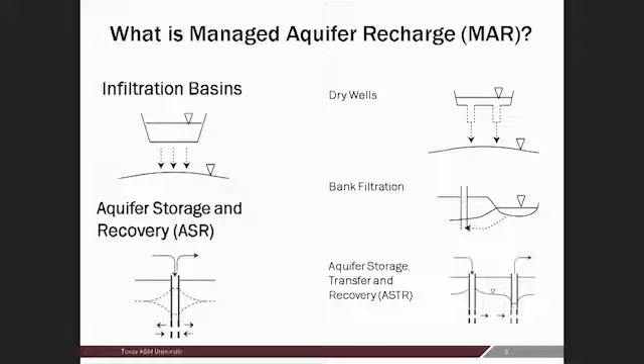There's also what we call dry wells, which are wells into the unsaturated zone above the groundwater that will allow water to infiltrate. This is a really popular technique in Arizona. Bank filtration, where we're somehow accelerating recharge from a river or a surface water body, and then aquifer storage, transfer, and recovery, where we're injecting into one well and taking out from another. And so I start with this just to give the idea that there are a number of these techniques that can accomplish the same thing as ASR does, but might be more appropriate for different geologic settings.

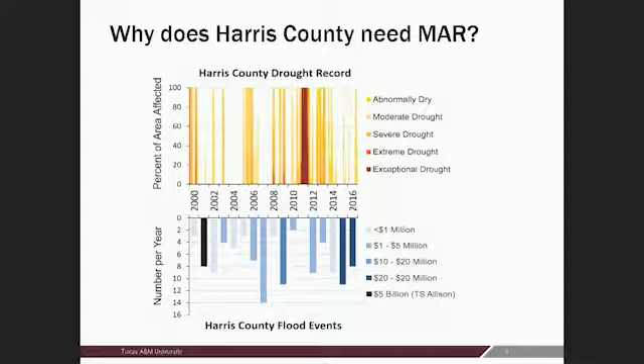And I show this slide for two reasons. One, because I want to show that Harris County is indeed alternating in flooding versus drought events. And two, to make a little bit of an excuse. So we did this, and you can see I stopped this graph right before a major flood event, right? So we finished this project the month before Harvey hit. And we wanted to do a follow-on really quickly with some of the pilot testing, and I'll talk about our pilot testing later. But the flood control district was pretty busy for the next year after that. So we're back up and running, and hopefully, we're part of this portfolio of projects that the bond issue there is going to fund.

Okay, so managed aquifer recharge for stormwater and flood control. And basically the question we're asking here is, can this technique be used as a flood control tool in Harris County? And that was the original question, coming out of these big events. And what we wanted to do was a feasibility study followed by the pilot project that I mentioned.

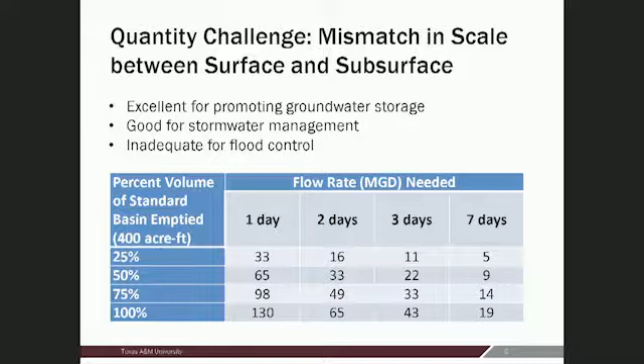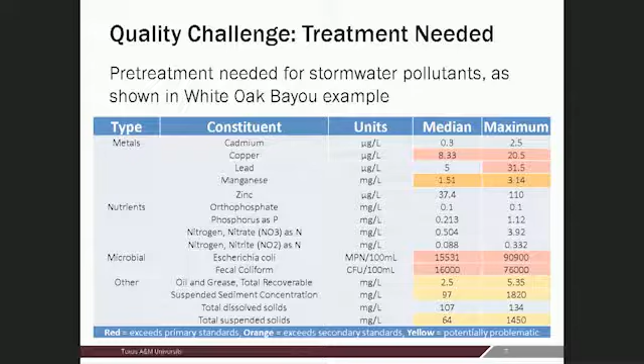And so we see that copper, lead, E. coli, and fecal coliform are 4 of our biggest offenders here, the things that we have to worry about the most. The microbial ones are somewhat easy to deal with because it's easy to chlorinate, say in an ASR well as you're injecting. You add some chlorine and that's less of a concern. But the metals can be problematic and are classic pollutants in stormwater.

The other things that cause problems are the suspended sediment concentrations, the total dissolved solids, and the total suspended solids for 2 reasons. One, the metals tend to tag along with these particulates. And 2, they tend to clog our formations. And so high values of these require frequent cleaning of the well, frequent maintenance of the infiltration facility.

Okay, then our third challenge is the geology challenge. So we were looking, and this is probably pretty universal for the Gulf Coast aquifer, but not necessarily for every aquifer in Texas. The geology challenge here is that we have these sequences of sedimentary layers.

Thanks for the figure, by the way.

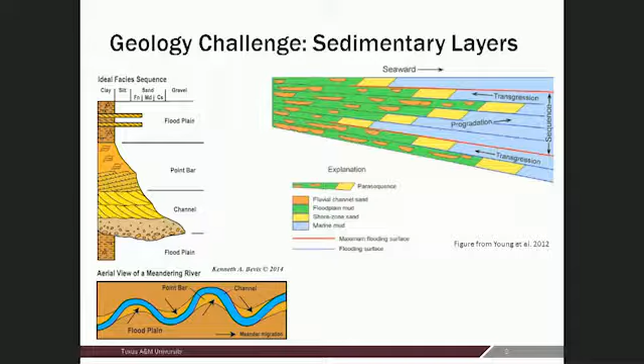And these facies, which represent the ocean and the seaward progression and the deltaic layers coming in and out, cause deposits where we have channel sands, which are good for infiltration and ASR, and then interspersed with floodplain muds. And this can be quite problematic because what we want to hit are the high permeability sands and avoid the muds because they have lower infiltration rates.

And so looking at this, we can maybe try to target areas that have more of the more favorable layers and less of the other ones. But the real challenge is this idea that it's very heterogeneous, very mixed, and we don't always know beforehand what we're getting when we look at any given site.

Okay, so I want to talk about some of the pluses and minuses of each of the 4 different methods that we looked at to achieve this goal of emptying or partially emptying portions of these detention basins so that either more floodwater could possibly be stored in them or more stormwater, or that we could promote groundwater infiltration in these areas. Okay, so the first one is enhanced infiltration.

And here we alter the bottoms of existing basins to promote their natural infiltration rates. And I say natural, but many of these basins, the way they're constructed, aren't constructed in a way that would promote infiltration. In fact, very frequently, they're dug into a heavy clay on purpose. Right? So we want to ask, okay, is there something that we can do, maybe soil amendments, trenching, or proprietary systems that might help us promote infiltration?

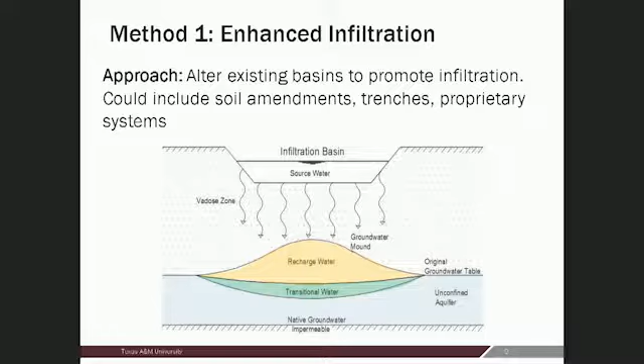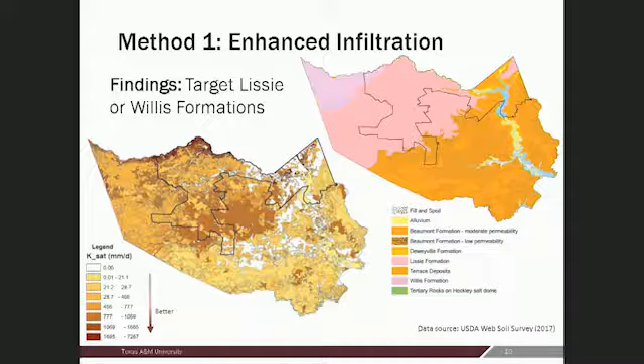Okay, so our next question is how much can we reasonably expect from this scenario? And say under a unit head gradient, so 1 meter of head, what's a reasonable fraction of stormwater that should infiltrate? In order to empty a basin, we would need to see an infiltration rate of 2,500 millimeters per day, which is quite high if you look at the average values in most of these areas, closer to a saturated conductivity of under 1,000.

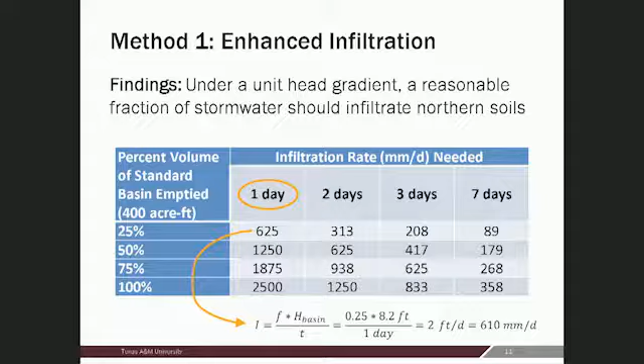But what this means is 2 feet per day, or 610, was our general target for getting some water down and partially emptying the basin to allow for a little bit more storage over time.

Okay, so in general, we said, well, this is really low-hanging fruit. This is something, if we could achieve those kinds of infiltration rates, the county could come back in, retrofit some of these basins with whatever method or technology we suggested to do this. And that might be a fairly easy, low-cost, easy maintenance sort of procedure, but we might not get the volumes that we would really like to see ideally.

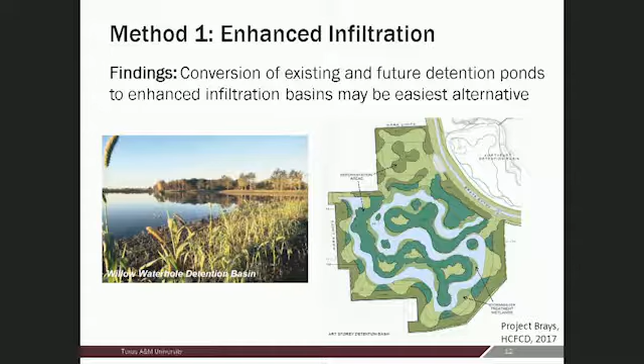So the next possibility are dry wells or unsaturated zone wells. So these would be drilled, say, in the bottom of a basin to overcome that geology, that layered geology challenge. So you could drill these into, say, a sand formation that was overlaid by a clay formation. And that would mean that these would be good.

So here's an example from California where they had this same sort of contrasting clay, sand, that worked fairly well and could work passively at the bottom of, say, one of these basins. Or it could be coupled with passive pretreatment in a scenario, say, like in a storm sewer.

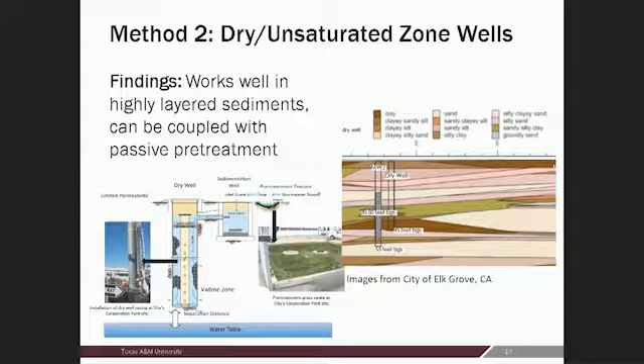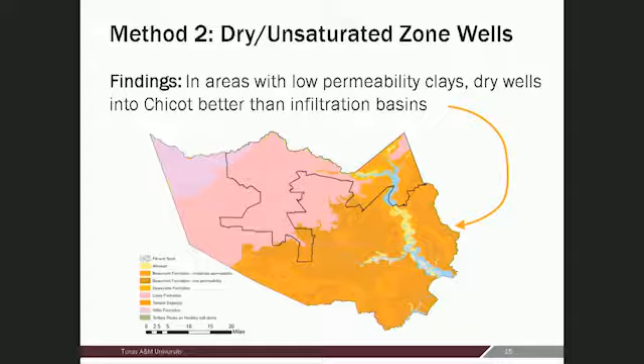That's how they're done typically in Arizona. Okay, so we said, well, in this case, we're better off putting these in areas where there are low permeability clays at the surface, and we can maybe try to get below them into the more flowing formations of Chicot, and they would work in these sorts of areas better than, say, infiltration basins.

Okay, so we did a little bit of a modeling study here to determine what sort of volumes we could get from these. And one of our big findings here was that instead of focusing on having very big wells and putting lots of volumes down into them, what we really needed to see were these small wells that had maybe low volumes, so over the course of an event, maybe only 50,000 gallons infiltrated, but lots of them in multiple places. So more of a low-impact development type of infrastructure or best management practices types of infrastructure rather than one big project.

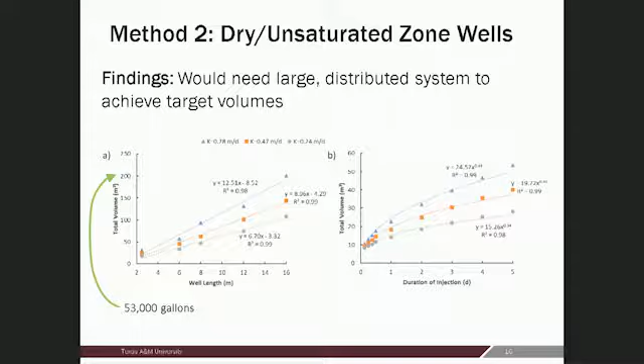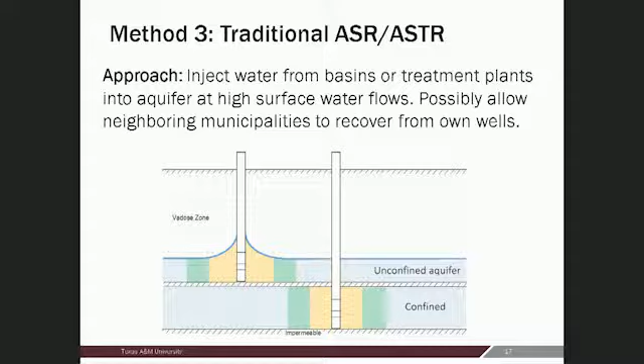So there's some talk of encouraging developers to put in these sorts of wells alongside their sewer systems. Okay, so traditional ASR and ASTR, we wanted to look at this from the perspective of putting these sorts of wells near a basin or near a water source, say an existing reservoir, or say near a water treatment plant that would otherwise discharge for non-beneficial use. And in this area, we have essentially the two types of wells, unconfined in certain regions and confined in the lower layers in the lower aquifers of the Gulf Coast aquifer.

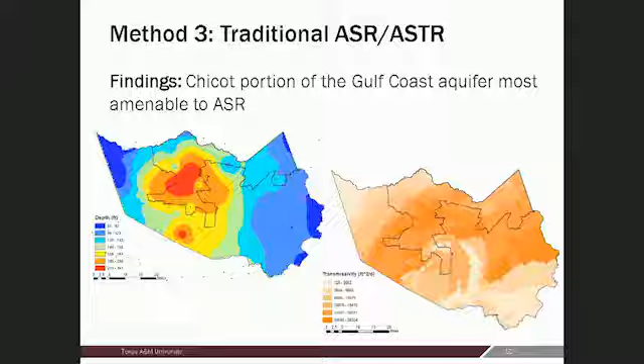So again, we found that the Chicot portion of the Gulf Coast would probably be the most amenable to ASR because history of depletion and current ongoing depletion in the lesser regulated areas of the county leaves room for potential storage, places where there's ongoing depletion, but maybe the subsidence hasn't reduced storage as much, and in these high transmissivity areas that would be able to accept the water.

Okay, so one of the big questions that the flood control district had was on pump technology and how much water could we possibly put down, and if we had bigger pumps, could we put more water down to get at the volume that we might need for our flow rates, for flood type situations. So, in general, our estimates showed that we could passively flow a well, so without any pump at all, at about 13 million gallons per day. And that would empty a standard basin in 13 days. We could use pumping to increase the flow rate, but it might be a bit of a waste of energy.

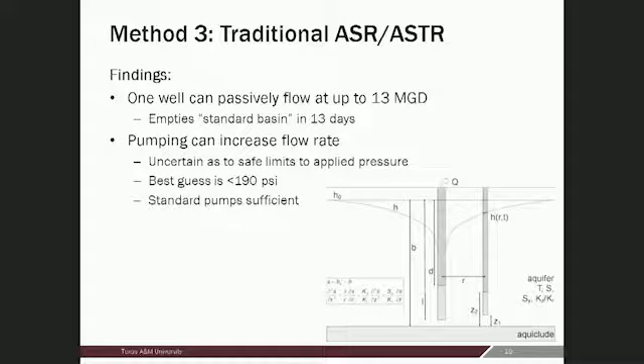And we don't want to get over an applied pressure of about 190 psi, because that's when we start having the same sorts of issues we have with hydraulic fracturing, right? We're changing our porous matrix. But below that limit, standard pumps are sufficient, but there's not really that much gain over just letting for passive infiltration. However, one injection well at 13 million gallons per day, which is big in the groundwater world, is not so big in the flood control district world.

And so this was sort of a back-of-the-envelope calculation about how many days, if we gave it 4 days, or 1 day with 4 wells, how far apart would these wells need to be spaced? That was the idea. How many wells do we need and how big of an area do we need to infiltrate that target volume of water? And so we're seeing in some cases we can't even do it, right? We can't do one day with just 4 wells. It's not possible to have that kind of flow rate into these aquifers. But we can get some reasonable values once we're either doing it more slowly or adding more wells.

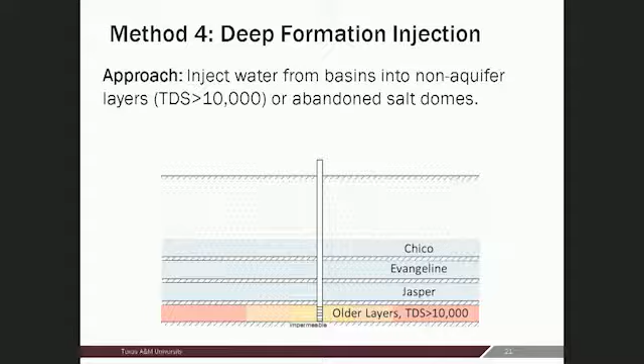The last thing we looked at was deep formation injection, and this is not so much for groundwater storage as it is for flood mitigation. So the idea here was that we inject flood water into these really deep basins or potentially even abandoned salt domes that might naturally have a total dissolved solids over 10,000. Now, why did we go for this? The idea here was that this was not regulated as drinking water, which goes back to the quality problem with ASR.

I didn't mention that, despite the quantity capabilities here, we have a fundamental problem with the regulatory framework. I'll talk about that in a little bit. Hopefully we'll have time. Good,

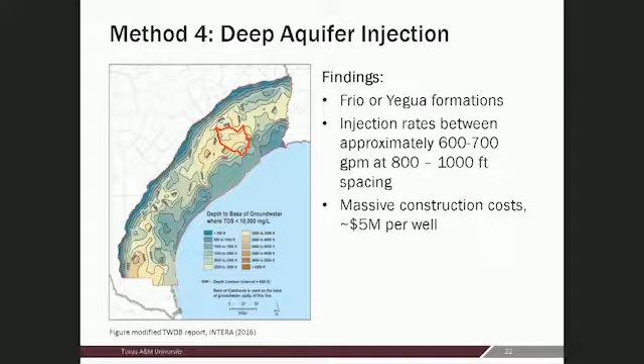5, okay. So looking at the deep aquifer injection and the most recent reports from Intera from the BRACS study, really, the Frio or the Yegua formations would be good here, but the injection rates that we would get would be approximately 600 to 700 GPM at about an 800 to 1,000 feet spacing. Not very good for the volumes of water we wanted, and also going down that deep, massive construction costs associated with this. It would really be prohibitive of taking this approach. So this was one we took off the drawing board pretty quickly because of the expense.

Okay, so to talk a little bit about the final challenge and the regulatory challenge, I told you the date, I guess, for my little bit of a third excuse here. So in 2016, we had a little bit different regulatory framework than we do now, which is now a positive thing. So looking at these different things, we looked, okay, what legally will the flood control district need to consider when they're doing these solutions?

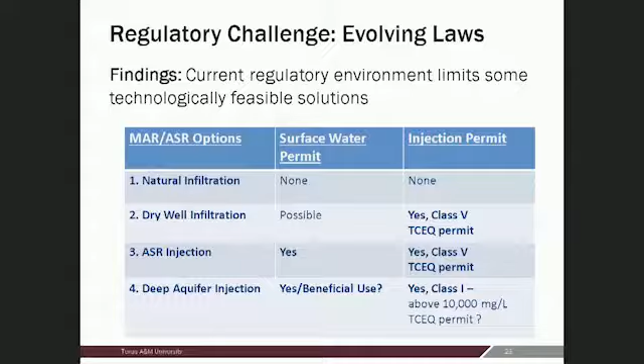So for natural infiltration, the best idea we had of this was that a surface water permit and an injection permit would not be required. So anything that enhanced natural infiltration, even if we're doing something like a soil amendment or trenches, it was unlikely that we were going to need permits for those. Dry well, however, possibly we would need a surface water permit, and we would certainly need a Class 5 injection well permit from the TCEQ.

Now, the TCEQ, based on some of the recent regulatory changes, has now gone to saying that the scenario has become much more possible here to inject stormwater under a scenario like that, because instead of the regulation, which used to be if you're injecting water, it has to be a drinking water quality, they've now accepted this idea that non-degradation of the aquifer is what matters. Non-degradation of water supplies is what matters, as opposed to only being able to inject drinking water.

And for the ASR community, that's a huge change. That's like a sea change, because it allows us to be a little bit more flexible as long as we protect groundwater quality on the water source that we use for these. And as far as the deep aquifer injection and a surface water permit, that was a big open question for us, but we would need a Class 1 injection well permit.

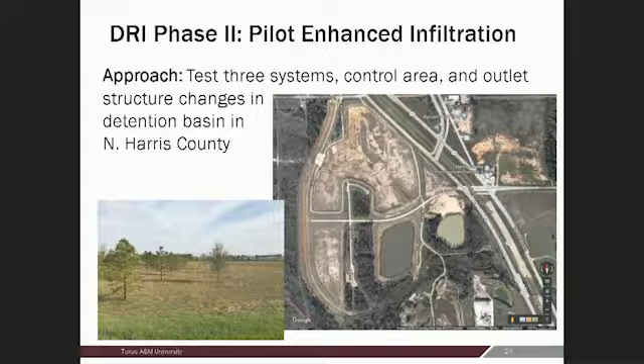So just to wrap things up here, as I mentioned, we wanted to get started on a pilot study right away. Harvey intervened, but we are now back in the progress of doing this. So we have a basin near Tomball that we are investigating for this, in that northern portion where we thought infiltration would be at best. And we're testing 3 different types of enhanced infiltration against a control. And we're also testing the county outlet structure changes in the detention basins to see if that water can safely be held a little bit longer than that 24-hour requirement that they have.

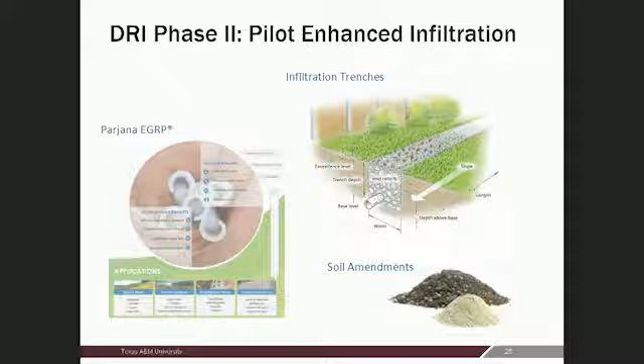So the 3 enhanced infiltration technologies we're testing are infiltration trenches, so long, narrow trenches filled with high permeability material. Soil amendments, so a mix of soil that has a higher permeability at the surface and can store a little bit more and let it infiltrate longer. And then a new system that is proprietary out of Michigan called Parjana, which suggests that we can speed up infiltration that way.

So in conclusion, just a few takeaways. ASR and Managed Aquifer Recharge are typically not fast enough for true flood control, but I would say they can be an important part of a stormwater management portfolio, particularly a low-impact development or best management practice-based portfolio. The techniques should be matched to geology, and in our area that we investigated, the layering and the sand content are 2 of the biggest key considerations, and where the surface intersects those.

Stormwater quality and pretreatment needs, probably the logistics of these are one of the biggest challenges. A little bit more science is needed there to determine how much some of these contaminants can be remediated as they're infiltrating. But the science is there from the stormwater management community. What's really lacking is a local knowledge of what's in the water and when it's in the water.

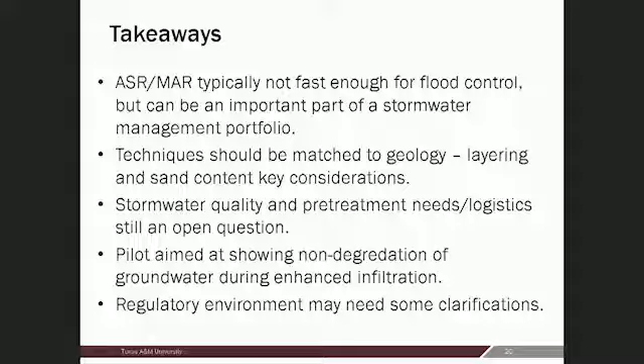But the pilot study is aimed at showing non-degradation of the groundwater nearby, and aimed at seeing if these techniques are going to be appropriate or if maybe they're just going to be insufficient in these soils. We hope that enhanced infiltration will give us rates that will be at least a little bit helpful from a stormwater management perspective. They'll certainly be helpful from a water infiltration, groundwater perspective. But we will hopefully have some results to show this time next year.